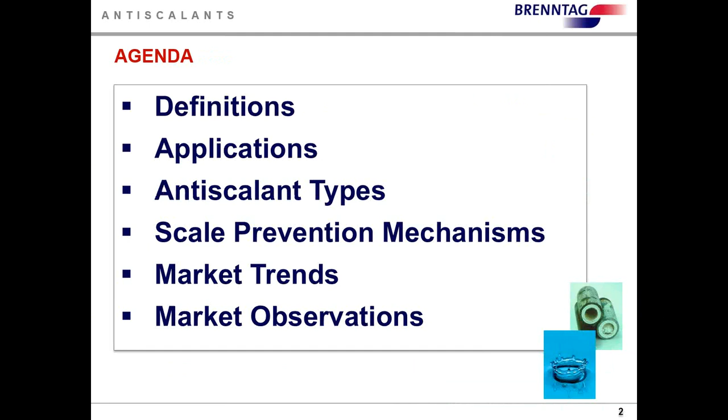When I was with Calgon, when I first started putting this together, I actually lost the slide. I apologize, I actually lost the slide here, my apologies.

When I was with Calgon, we used the term for describing scale: it is material that comes from the water, things like calcium that will precipitate out of the water, coming from the water. Whereas a deposit is something that we consider coming into the water.

Brian, if you'll excuse me for one second, something is a little off on this presentation. I'm going to escape.

When I first started to put this presentation together, I thought of it kind of as a crossword puzzle. And when I looked at all the acronyms we have in our industry, HEDP, PAA, AMP, we'll hear a lot of acronyms during our presentation today. But after I thought about it longer, it made more sense to think of these as children's building blocks. As we put these chemistries together to work on different types of waters, it came to me as more like building blocks. People will take these building blocks and put them together in some form to create a product that will do many different things: prevent scale, reduce corrosion, prevent deposit or minimize deposits. So I thought of these more along the lines of building blocks rather than a crossword puzzle.

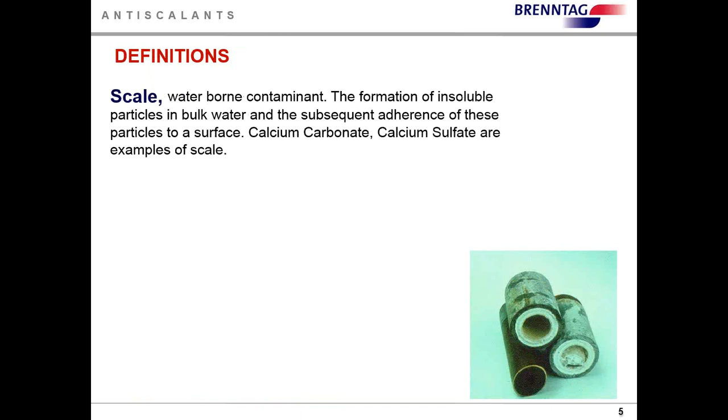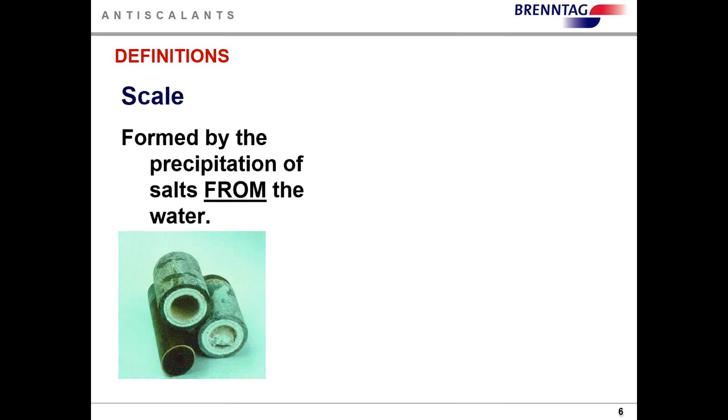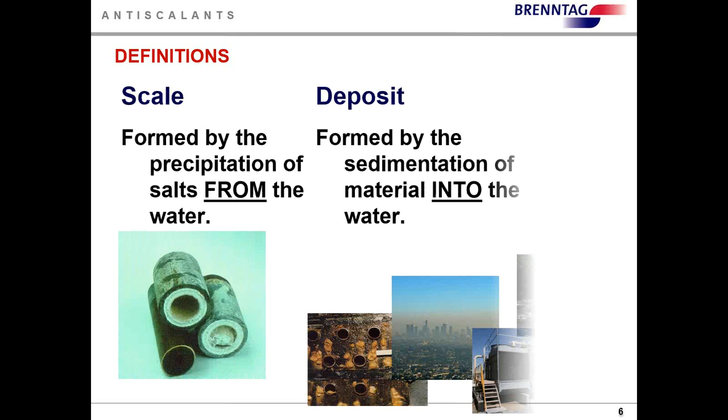So we kind of did these already, the definition on scale and also on deposit. Back to my Calgon days, this has always been helpful to me to think through this: scale comes from the water, whereas a deposit comes into the water, from being scale into being deposit. I will say, however, oftentimes these are used back and forth, scale called deposit and vice versa, but just for understanding. And whenever we're looking at this market, we also need to consider corrosion as something that needs to be addressed when looking at any kind of scale inhibition.

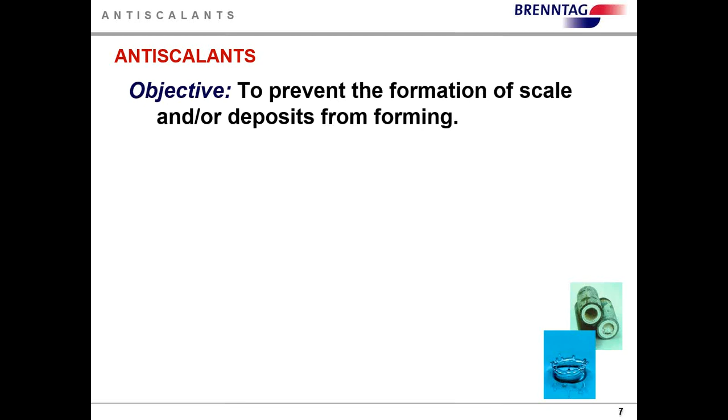The objectives are to prevent scale formation and prevent deposit from forming. Why? To ensure good heat transfer and prevent flow restrictions. And how this is done is via threshold inhibition, crystal modification, dispersion, and chelation.

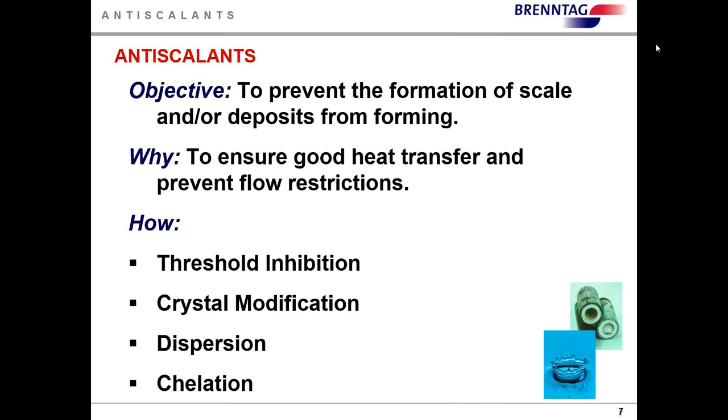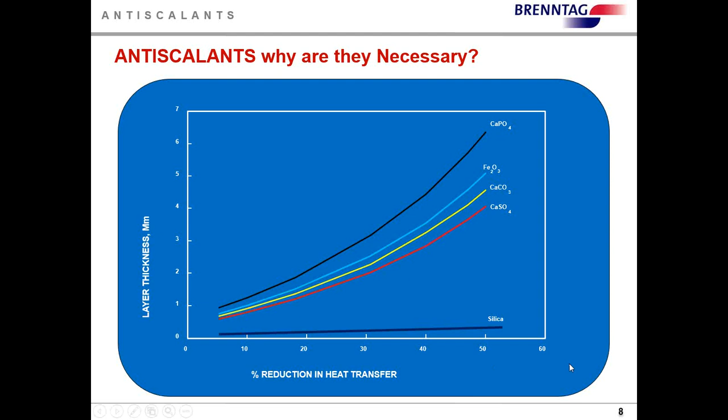This is a chart that I like to show, and basically what it shows is what a small amount of scale and how it can affect heat transfer in the system. If you look on the very bottom, just a small amount of silica scale can greatly reduce the ability for, let's say, a heat exchanger to exchange heat. Whereas calcium sulfate, calcium carbonate, and all these other components also restrict heat transfer. I always thought this was a good visualization to show the importance of a good scale prevention program.

Some of the applications we see in the market: a variety of different things, cooling water, boiler water, reverse osmosis. The one I was always struck with was detergents and cleaners. As many of you may know, I have a very strong water treatment background, but during my time working with anti-scalants, how often the discussion around detergents and cleaners would come up when working with different water treaters. A variety of different applications: mining, slurry stabilization, just to name a few.

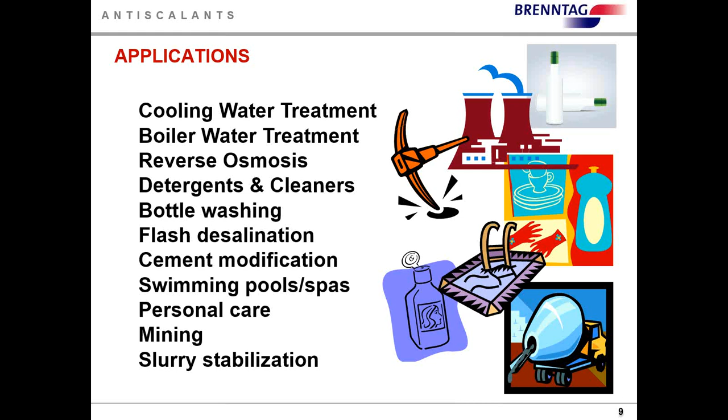The type of chemistries we will be discussing today are phosphates, chelants, organic polymers, and phosphonates. Some of the mechanisms used to prevent scale are threshold inhibition, crystal modification, dispersion, and also chelation.

Let's start out by first discussing threshold inhibition. As scale is formed, it's very much like the children's building blocks, as they are put one right after another. I like to think of threshold inhibition as maybe a little bit of wax paper put in between those blocks, to prevent that structure from forming and building. That is what is called threshold inhibition. At the moment a crystal starts to form, these chemistries will tend to disrupt that formation and prevent it from occurring.

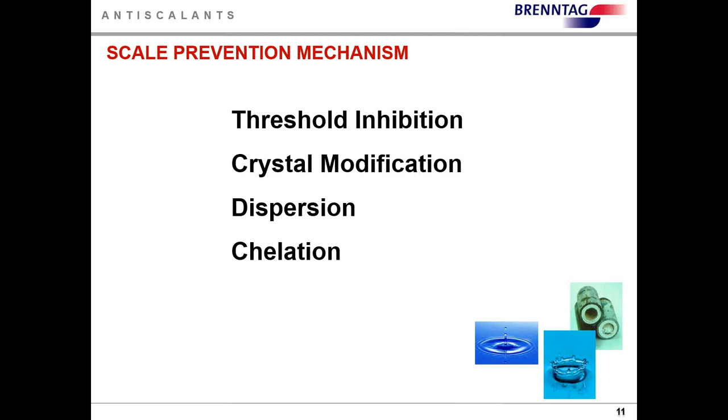Crystal modification, although very similar, is basically as that crystal begins to form, what crystal modification means is we start to disrupt the formation of the crystal. I think these are very good pictures. The picture on the left clearly shows some well-formed crystals; I believe these are calcium sulfate crystals, very well-formed. However, the slide on the right clearly shows the disruption that occurs with these particles, preventing them from really getting a good hard structure. So crystal modification is allowing the crystal to form, but disrupting it so it's not as strong or as adherent as it was untreated.

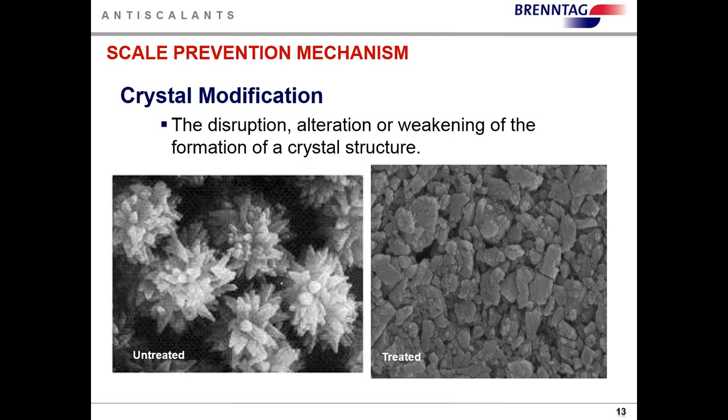However, in cooling water, boiler, and anti-scalant markets, we do just the opposite. We add a negatively charged product that disperses these particles even more, preventing them from settling out. So I always think of dispersion as the opposite of coagulation: a negatively charged particle disperses, while a coagulant neutralizes charges to make particles larger for better settling.

This is a slide I had from many years ago. Crude oil and water on the left, a small amount of dispersant in the center, and a larger amount on the right. You can clearly see how the particles are now dispersed throughout the water, an example of dispersion.

We recently did a webinar on chelation, and during that time I was struggling to find a good definition. I went to the book by Colin Frayne, who I know very well, and found his definition extremely good: organic compounds having the ability to take metal ions in water and produce a soluble complex. The best definition I've heard of chelation or chelants.

I always thought of a chelant as something like a crab or a lobster. Chelation comes from the Greek word for pincers, with a chelant grabbing hold of the calcium in the water, or in the case of metals, holding those metals in solution and preventing them from coming out. That's a little visual I've always used, along with Colin's excellent definition of chelation.

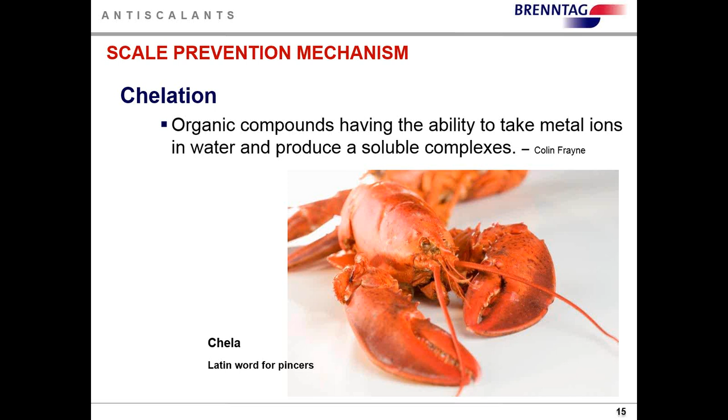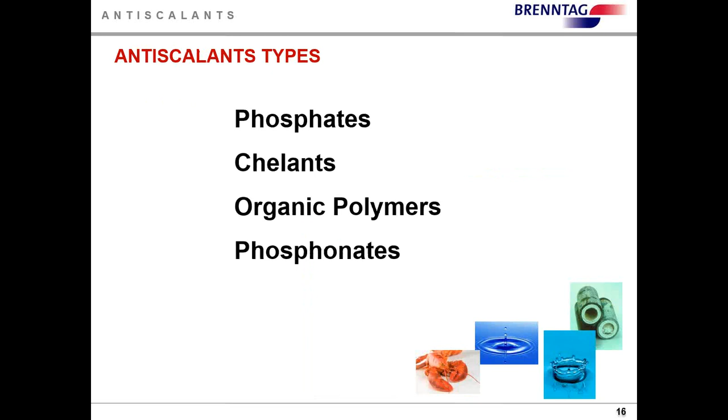Phosphates basically come in two forms: polyphosphates and orthophosphates. Phosphates will tend to sequester minerals. They provide corrosion control, prevent scale, and have the ability to remove deposits. They're primarily used in drinking water systems to prevent corrosion.

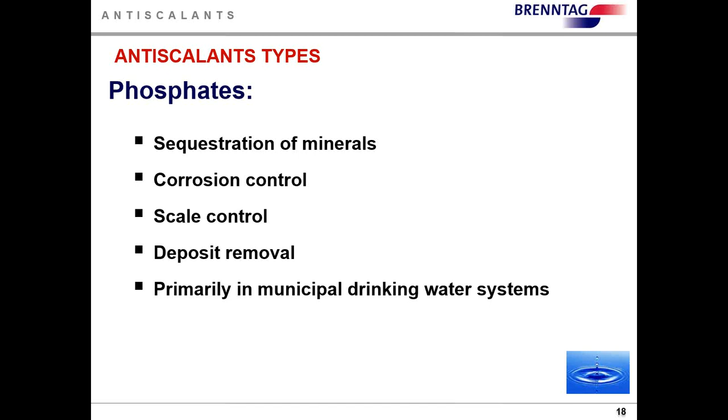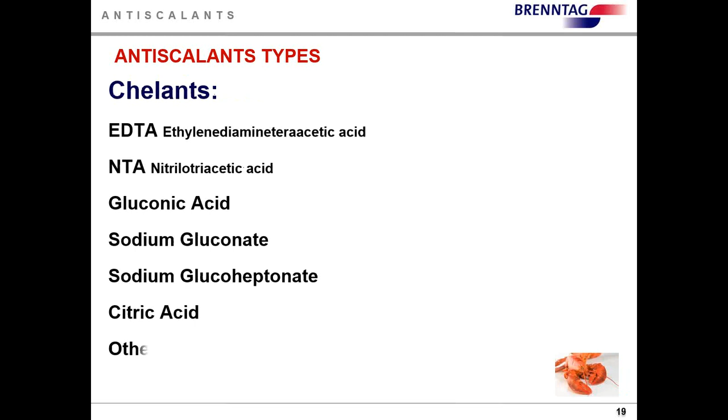Chelants come in many forms. These are just some of them. The full list runs about three pages long, but the real key ones are EDTA and NTA, also citric acid. EDTA is oftentimes used in boiler treatments. These are just some of the chelants available on the market to prevent scale.

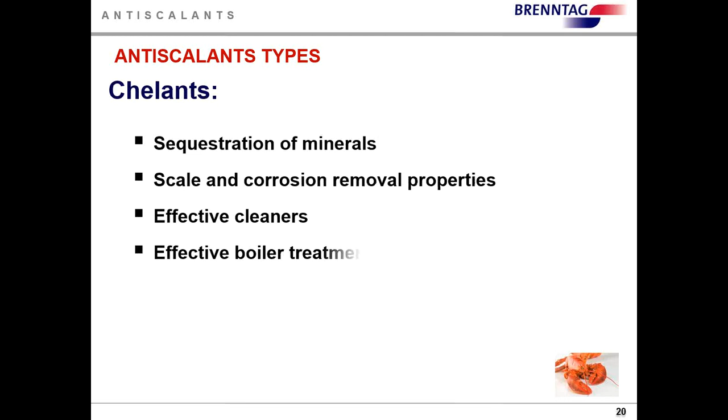Chelants will also sequester minerals. They provide scale and corrosion removal properties. They can be effective cleaners and effective boiler treatments.

Organic polymers—here come the acronyms. We find that in this market, quite a bit of acronyms are used: PAA, HPMA, PASA, PESA. The way my mind works, I think of many of the acronyms and then try to remember the name of each chemistry, but for the most part the acronyms are what's primarily used throughout the marketplace.

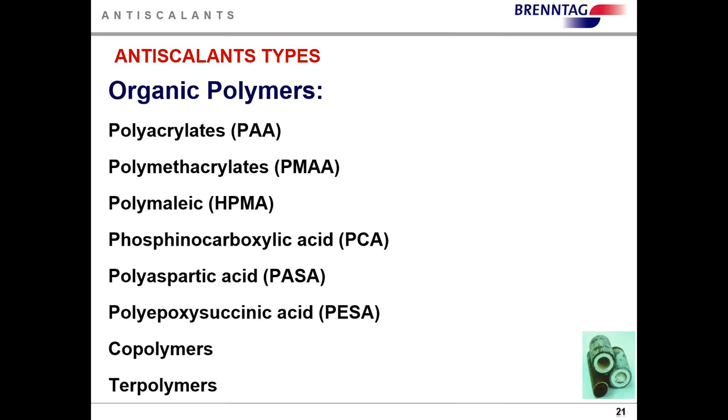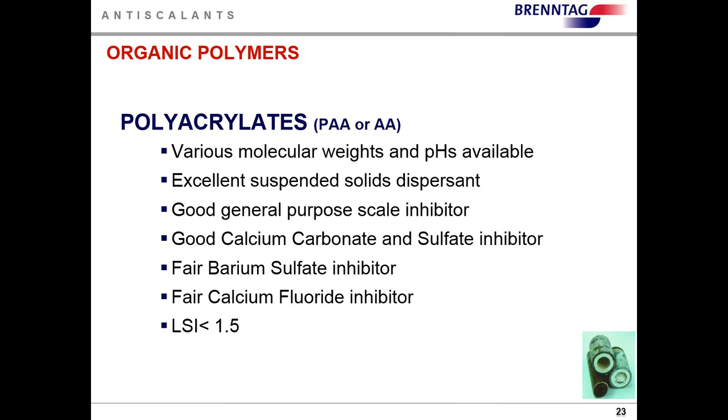Polyacrylates are basically a homopolymer, available in various molecular weights. They are excellent for suspended solids dispersion and are good general purpose scale inhibitors, good for calcium carbonate and sulfate, fair on barium sulfate and fair on calcium fluoride, and they tend to work at an LSI below 1.5.

Polymethacrylates, PMAA, again available in various molecular weights and pH ranges, are a good general purpose scale inhibitor. They're very good for calcium phosphates, which is why they were oftentimes used in many of the old phosphate polymer programs. They're good for transportation of iron, oftentimes used in boiler formulas, and also effective at less than an LSI of 1.5.

Polymaleics, HPMAs. Various pHs are available, although molecular weight tends to be the same with all products. They're excellent for calcium carbonate and sulfate, very good for dispersion. They're much more iron tolerant than PAAs. They're excellent under stress conditions, and you can see that a little wider range on an LSI, 1 to 2.0.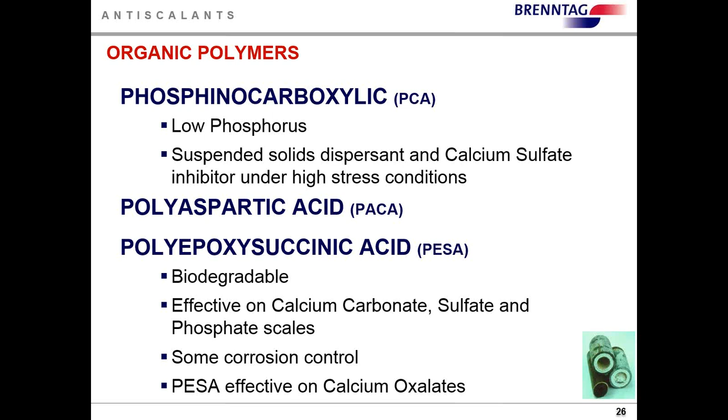So back to the slide, homopolymers, copolymers, and terpolymers. During my time as training manager, this has always been an area of kind of struggle to really understand by folks coming into the industry.

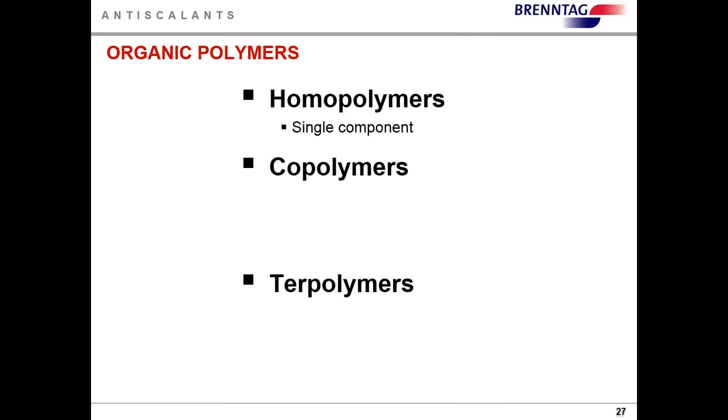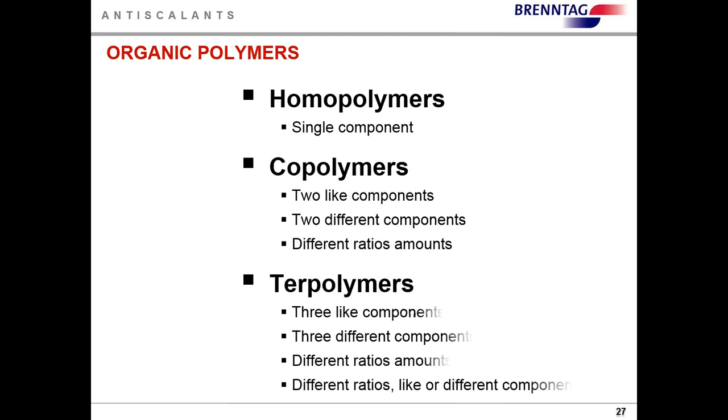A homopolymer is basically a single component product, whereas a copolymer is a two-component product. Can be two different components, can be two like components, can have different ratios. What I mean by two like components, I have seen products that are simply PAAs, polyacrylic acids, but at different molecular weights in the same product. And likewise, terpolymers are three components, could be three different ratios of different likes or different types of chemistries.

So I put this slide together to purely finalize the understanding of copolymers and terpolymers. So if you had one specific product in a drum, say a polyacrylate, that would be known as a homopolymer. The homopolymer is of a product, pH of 7, molecular weight of 2,000.

However, if you were to blend that product and put, like we talked about earlier, two different molecular weights of the same polyacrylate chemistry, you would be creating a copolymer. Conversely, you could make that same copolymer with a different ratio. One of the more common ratios in our industry is what's called an AA-AMPS copolymer.

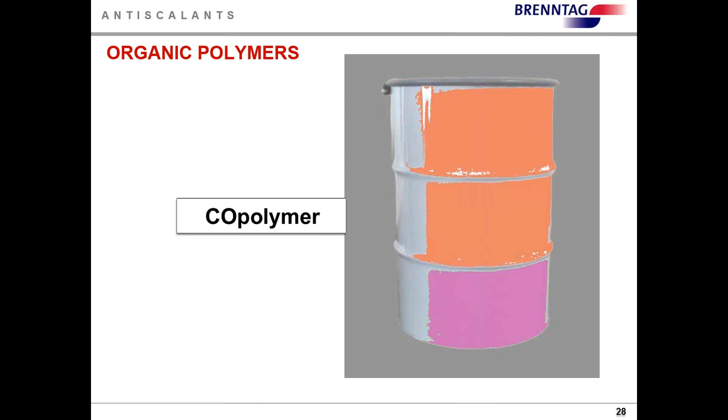There's a 60-40 percent version and an 80-20% version of the same copolymer. Although both function very, very differently, they would both still be considered a copolymer. And again, putting in a different chemistry altogether and creating a copolymer. And then just to finish everything out, a terpolymer would be a combination of three different materials.

Copolymers, again, a blend of two different or like chemistries. They are the second generation organic polymers. There are numerous copolymers available. The synergistic effect of putting the two products together can really help improve the performance of each individual component, and they can yield a wide range of scale inhibitions.

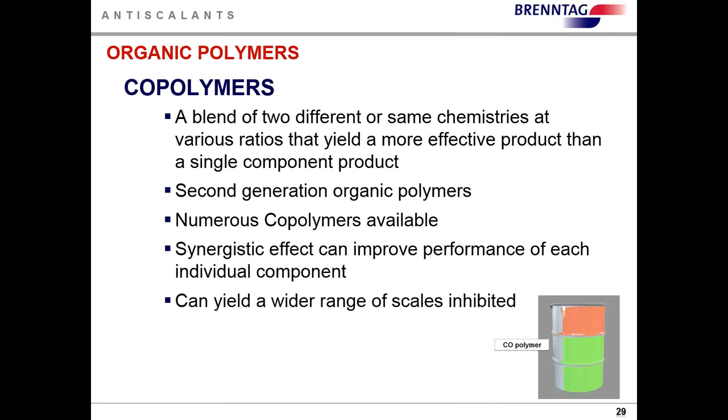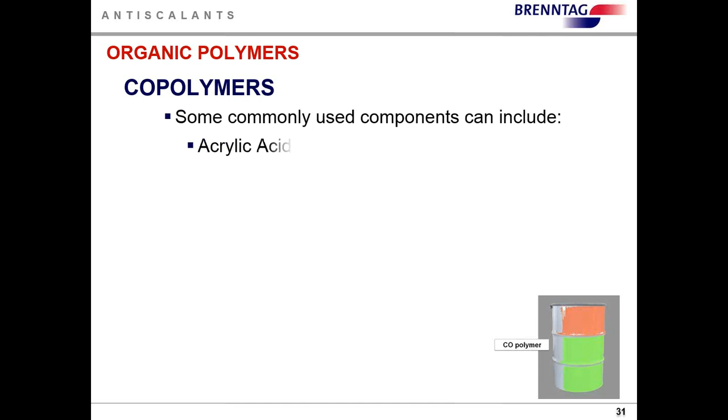Again, they're effective over a wider LSI range. Numerous applications can include a variety of different things: magnesium silicate, barium sulfate, calcium oxalate, struvite control. We'll go through struvite a bit later, and others. Some of the more commonly used components in copolymers can include polyacrylates, maleics, sulfonated styrene, acrylamides, and others.

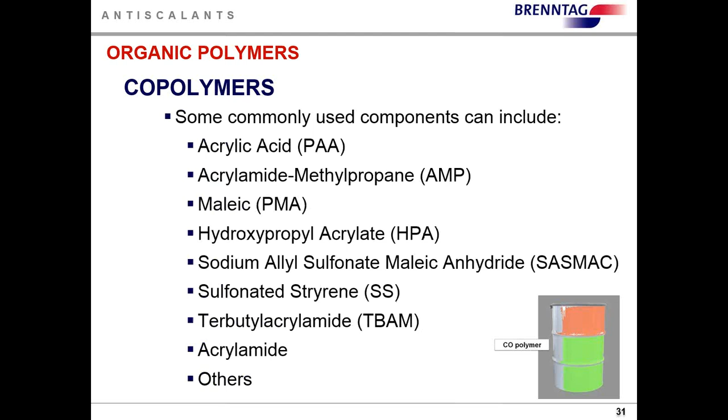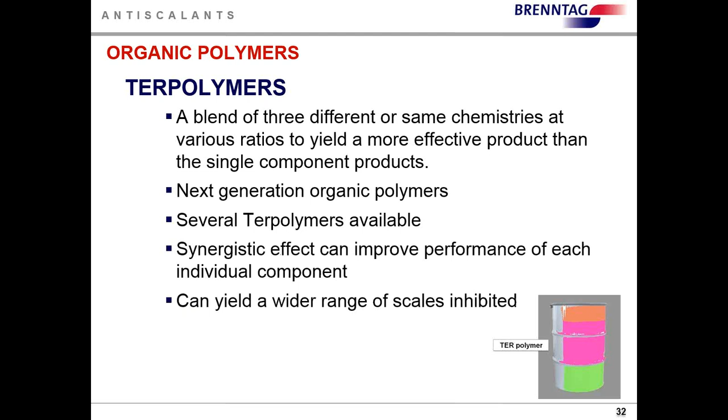Again, you do see the synergistic effect between the components, improving each individual component. And they can yield a treatment over a wider range of scales. Again, effective over a wider LSI. Numerous applications can include a variety of different things. They tend to be excellent in high stress applications, high heat applications, silica control, and a variety of different applications. The terpolymers are finding to be very effective.

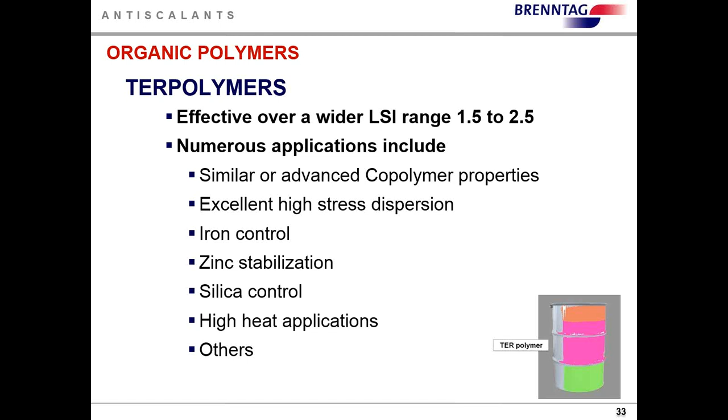Some of the more common copolymer or terpolymer additives, polyacrylates, you'll see basically the same players as in copolymers. With one exception, I do see much more often proprietary components found in the terpolymers rather than in the copolymers.

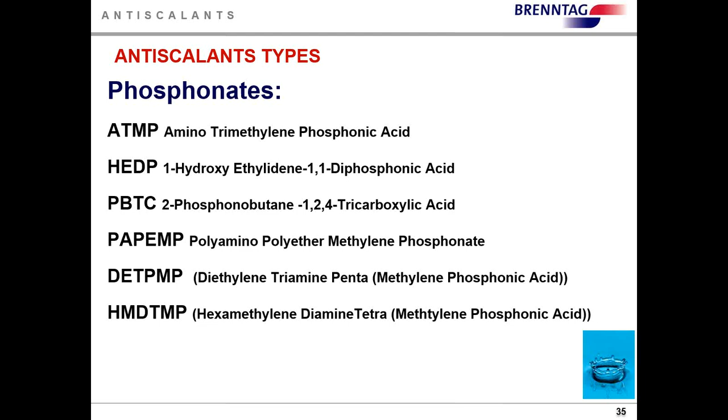Now let's move on to phosphonates. Again, a regular cornucopia of acronyms coming at you right now. ATMP, HEDP. HEDP probably being the most common in this industry, in this market, for scale inhibition, PBTC, and PAPEMP. ATMP, low-cost phosphonate, good general purpose scale inhibitor, but it is vulnerable to chlorine breakdown, which can possibly yield calcium phosphate scale. And it can work as a corrosion inhibitor when enhanced or blended with HEDP.

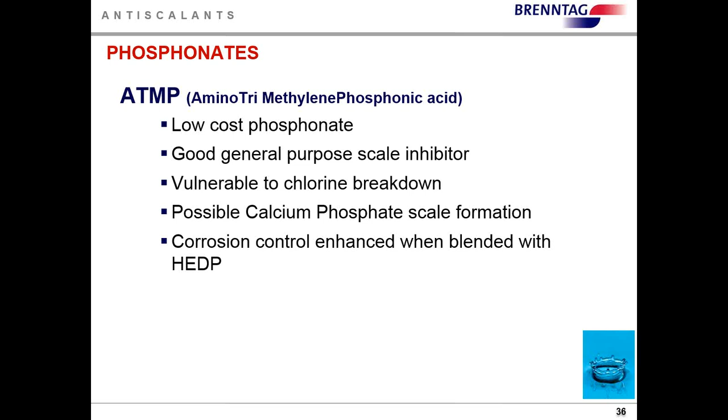HEDP is an excellent calcium carbonate inhibitor and works under higher stress conditions than ATMP. It's good for calcium fluoride inhibition, more resistant to chlorine than ATMP, and can also give corrosion control when blended with ATMP.

Going back to that calcium fluoride comment, there's a lot of experience with inhibition of calcium fluoride in the steel industry. When a continuous caster pours molten steel into the mold, it's typically packed with a high fluoride containing material, which gets on the outside of the steel. As the slab passes through the spray section, that fluoride is washed off and can react with calcium, creating potential for calcium fluoride scale throughout the system.

We found that HEDP did an excellent job preventing calcium fluoride scale throughout the steel industry in a variety of different casters. I was a little surprised to learn about the fluoride in the casters when I first got involved in it.

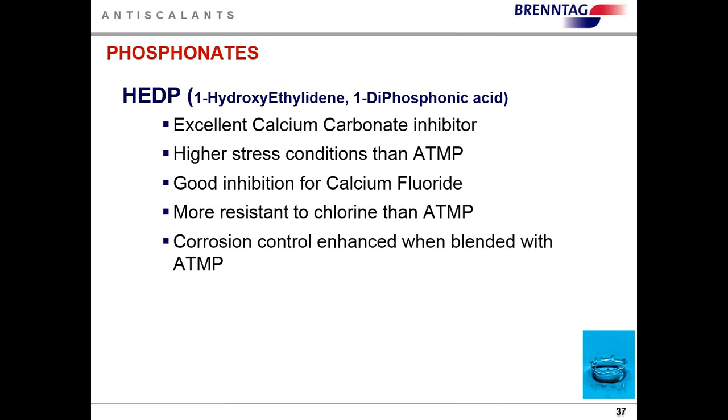PBTC is not a new product, but it's really excellent for high hardness and high stress conditions. It's excellent at high alkalinity and performs well in the presence of chlorine and bromine. It's a good zinc stabilizer, and can also be an effective and good chelant.

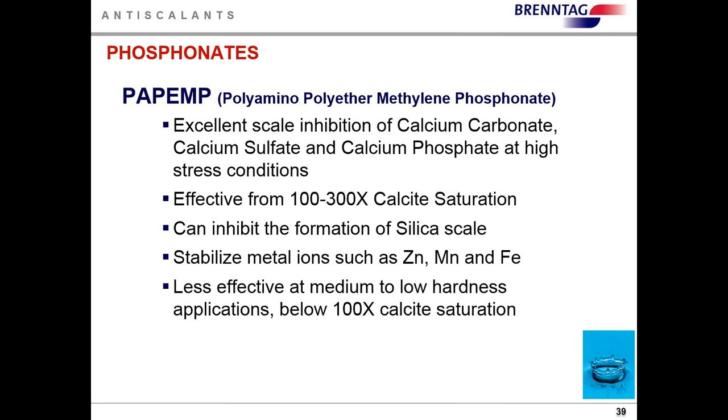PAPEMP is another high-stress product with a lot of experience behind it. It's an excellent scale inhibitor for calcium carbonate, sulfate, and phosphate under high-stress conditions, effective over 100 to 300 calcite saturation. It can inhibit formation of scale from silica and stabilizes many metal ions. However, it is less effective in low hardness applications below about 100 times calcite saturation.

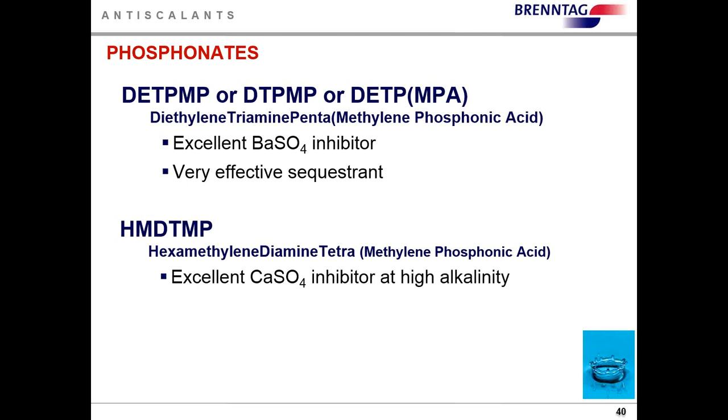DTPMP is an excellent barium sulfate inhibitor and a very, very effective sequestrant. And HMDTMP is excellent for calcium sulfate in high alkalinity applications.

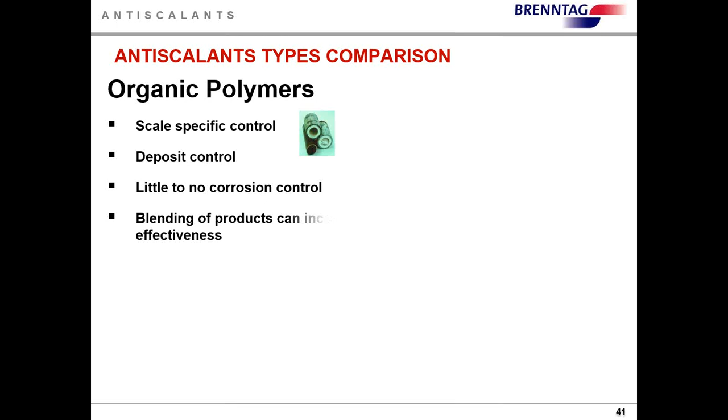So if we look at each individual product family: organic polymers tend to provide scale-specific control. They control deposits very well but give little to no corrosion inhibition, and blending products can increase their effectiveness.

In the case of phosphonates, they provide excellent calcium scale inhibition and give corrosion control. However, they do little for total suspended solids control, and much like organic polymers, blending can improve their effectiveness.

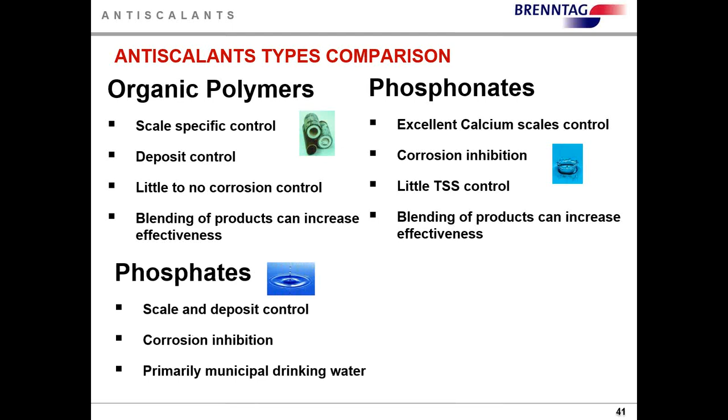Phosphates can control scale and deposit. They function very well as corrosion inhibitors and are primarily used in municipal drinking water systems.

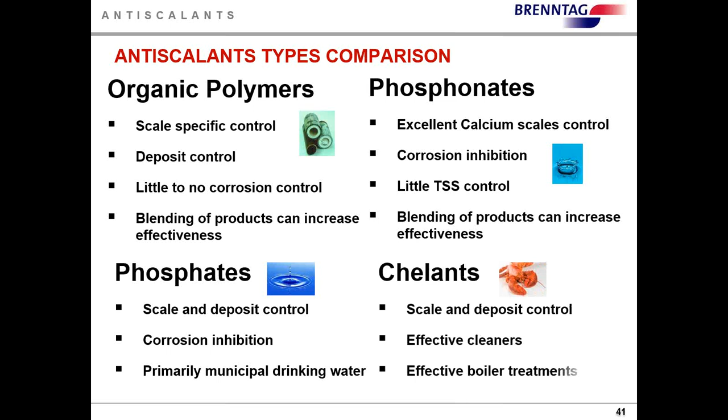Chelants provide scale and deposit control, can be very effective cleaners, and can be effective boiler treatments.

I'd like to move into some of the market trends we see. First is water reuse, with many demands by government on reusing water. Many parts of the country are required to increase cycles and shut down once-through systems, so water reuse is becoming a big push. This is also creating higher stress situations, higher LSI, and higher calcium or calcite saturations. It's a very growing market within our industry.

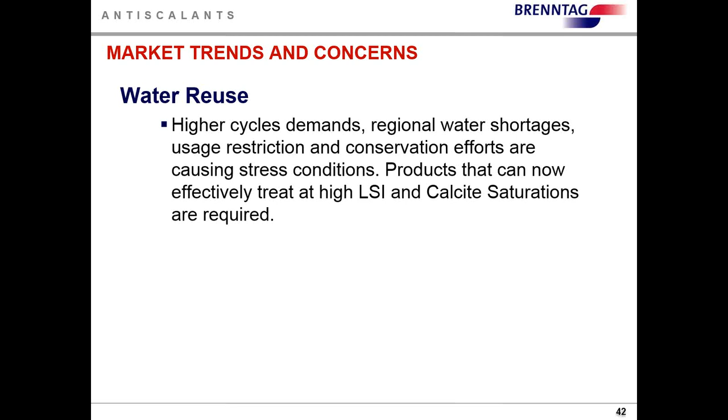Interestingly, where water reuse is occurring is really where we see the most silica in naturally occurring water. We're starting to see higher and higher concentrations of silica, and new and better silica control programs are being developed and evaluated to increase the amount of silica we can hold up in systems. Also, the geothermal market is an industry with major concerns about silica scale.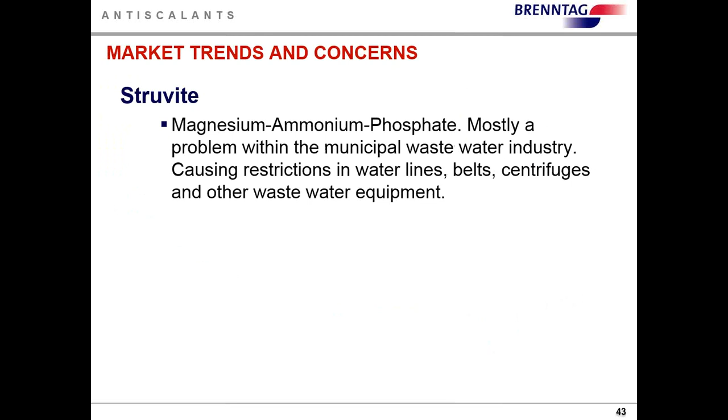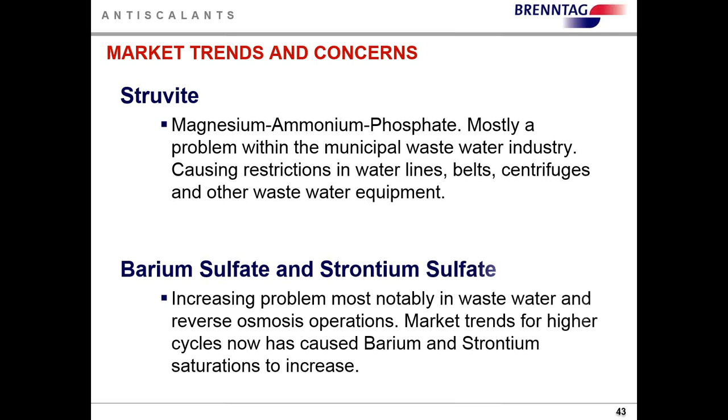Likewise, with the increase in water reuse and the search for new sources of water, we're seeing an increase in barium sulfate and strontium scales because of higher cycles. We're starting to see much more of these scales popping up where we haven't seen them in the past, and new applications are emerging, also in wastewater applications utilizing reverse osmosis systems.

Beerstone is a very interesting one, primarily in the ethanol process side of their business, not in the cooling or boiler, but rather on the process. It has many constituents, but primarily calcium oxalate and magnesium phosphate are the keys. It can also have organics, zinc and other minor components present, but it's a very, very big concern for the ethanol industry in their process, the formation of beerstone.

Another one I find very interesting is low and no phosphate programs. I'm starting to see an increase in governments requiring folks to eliminate or reduce the amount of phosphate in their discharge. The cleaner industry, detergent industry, was hit very hard over the last few years in that area. There's no reason to believe the water treatment industry eventually wouldn't fall into that focus also. We're seeing restrictions on the Chesapeake Bay, the Great Lakes, certain Carolina rivers that empty into the Atlantic Ocean, and the U.S. West Coast. So it's really becoming a big challenge.

The programs on the market right now are very effective at controlling scale. However, corrosion control still remains a challenge. If you remember the situation in Toledo with the algae, very much like what's going on there—although they haven't traced it back totally to phosphate, phosphates can enhance algae growth.

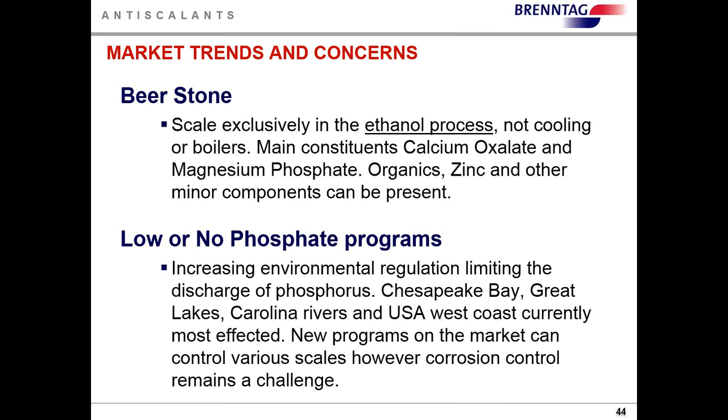This is just a map here showing where we're seeing phosphate restrictions. Again, California and the West Coast, the Great Lakes for a number of years, the Chesapeake Bay also, and then several rivers in the Carolinas that discharge out into the Atlantic Ocean.

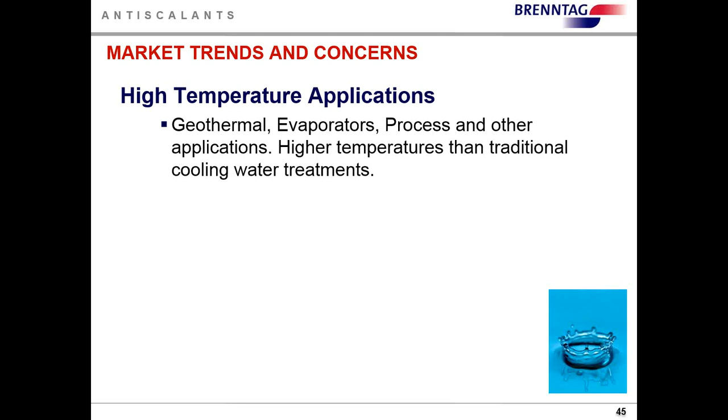Also starting to see a number of requirements for higher temperatures, specifically in geothermal evaporators and process. Typically when water treaters are designing programs, they're looking at what they call the skin temperature inside of heat exchangers, and typically that skin temperature can be anywhere from 120 to 140. However, in geothermal evaporators and in some processes, we're well into the 200s and higher as far as water temperature. So programs are being developed to control higher temperature applications.

And one more is reverse osmosis. We're starting to see much more reverse osmosis, quite a bit along the Florida coastline as the ocean starts to impinge on many of the wells. In the RO market, we're seeing needs for NSF certification and then also manufacturer certifications for these products on their membranes.

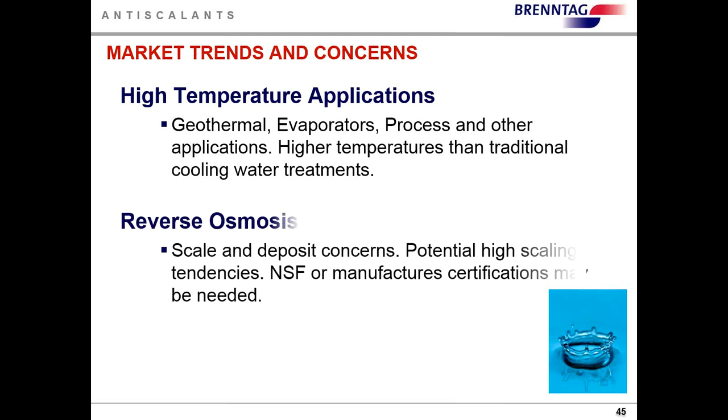So some of the personal observations I've made in the market over the years: there are numerous options available to everyone for controlling a variety of different scales. One of the things I've seen most in the market is we're seeing more and more new chemistries come on board, more and more options and ways of going about treating systems. Regional chemistries must be considered and taken into account when designing a program.

Product and treatment experience really boils down to what you feel most comfortable with when you're treating a system—understanding the pros and cons of the product or products, understanding what the limits are, and really understanding how best to treat a program based on the chemistry and the experience you have. And then how easy it is to control the products you're currently putting in. Is the program difficult to control? Does it get out of control very easily? That's also something very much to consider.

More and more, we're seeing need for certifications—NSF, FDA, CFIA being a Canadian certification. Again, this was an area that always surprised me: many water treaters are also interested in cleaners. So it's something that, when making calls and talking with folks, there's also an interest in these products being used for cleaners.

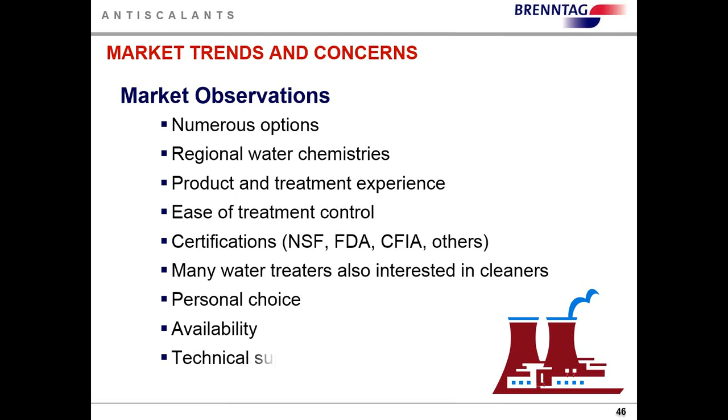Kind of going back to personal choice—what do you feel most comfortable with, which chemistries do you feel most comfortable with, understanding how they work? Another key thing is availability. How readily available are these building blocks for the components that you're putting together? Are they easy to get, or are they difficult to get? And then lastly, what technical support is needed to really provide good support to your customers and understand what is the best program for a particular system.

That really concludes my presentation for today. I very much appreciate your time and being here with us today.